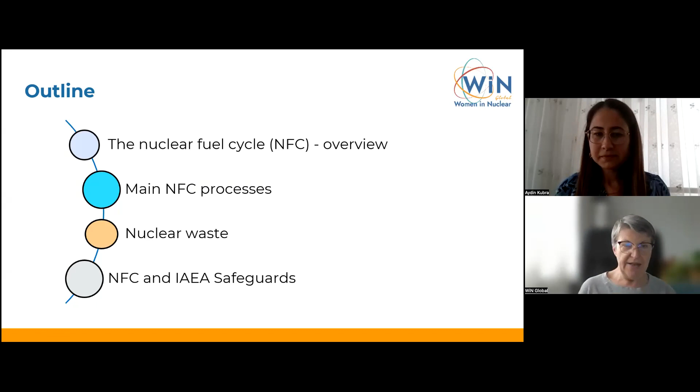As Kübra has said, if you have any questions, please put them in the Q&A at the bottom of your screen, and we will address them after I speak, although I don't mind if you have an urgent need to ask a question during my presentation. So we will look at what is the nuclear fuel cycle, what are the main processes, and we will also look at some waste issues and tackle the nuclear fuel cycle and safeguards.

Since this is a rather long presentation, I have created a Kahoot. I don't know whether all of you are familiar with Kahoot; it's a website that supports presentations with short quizzes. I've developed a few questions for some of the chapters, which we will address whenever the screen shows it. There will be a QR code plus a pin for this presentation, which you can access by scanning the QR code on your mobile phone or by connecting to Kahoot and entering the pin. Then there will be a question, and let's see who will have the correct answers at the end.

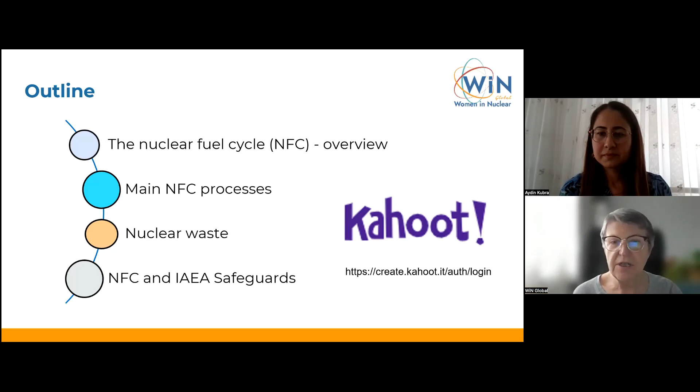So here is the display of the nuclear fuel cycle. What is the nuclear fuel cycle? According to the World Nuclear Association, it's a series of industrial processes where you convert certain material in order to make it suitable to generate electricity in a nuclear reactor, and also manage the spent fuel afterwards.

The nuclear fuel cycle, from the safeguards point of view, also leads to the production of nuclear material. And for those of you who work in safeguards, you know that nuclear material subject to safeguards is any isotope of uranium, thorium, or plutonium.

So how does this work? In order to first of all be able to produce the nuclear fuel, you need to know where it is.

So the first step in the nuclear fuel cycle is actually the exploration, where you look for either uranium or thorium. Once you have discovered where it occurs, then you need to mine it. The next step is to mill it, which means to crush the ore, put it into a mill, and refine it.

Then you need to take the concentrate to a conversion facility. And then, depending on the type of reactor you have, if it's a natural uranium reactor, you convert the uranium ore concentrate.

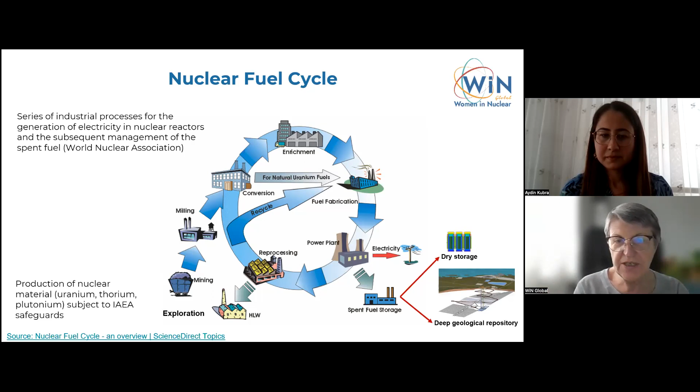into natural uranium UO2, which is then converted into fuel. Or for most power reactors, you need to enrich it first.

So you need to convert the uranium ore concentrate into UF6, send it for enrichment, and then convert it into UO2 again to produce fuel.

The fuel is then introduced into a nuclear power plant to produce electricity. After that, it is discharged.

It is either stored in a spent fuel pond for a while and then put into dry storage or wet storage, or for longer storage, it's put into a deep geological repository.

And in case you want to reuse some of the material that is still present in the spent fuel, you need to reprocess it, which is a process where you separate the uranium and the plutonium from the fission products. In a subsequent step, you separate the uranium from the plutonium.

So this is basically how the nuclear fuel cycle works. Let's also look at where nuclear material is produced.

So in the mining step, you produce either thorium-232 or uranium-238. In the enrichment process, you raise the U-235 isotope, which is the fissile one, which you need for the fission reaction.

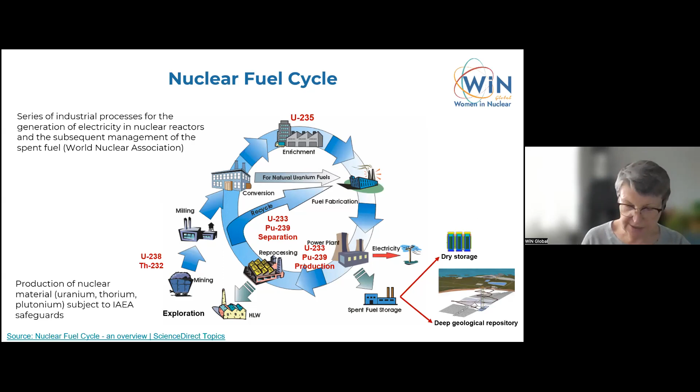So let's look at the concept of front-end and back-end nuclear fuel cycle. Everything in blue is the front end of the nuclear fuel cycle, that's everything from uranium mining and milling to conversion, enrichment, and fuel fabrication.

Whereas everything in green is the so-called back end of the nuclear fuel cycle, that's reactor storage and disposal or reprocessing. And then you can see these arrows going consecutively if you reuse the fuel.

Then you may have also heard about open or once-through nuclear fuel cycle. This means that the spent fuel is not reprocessed, whereas in the case of a closed nuclear fuel cycle, the spent fuel is reprocessed.

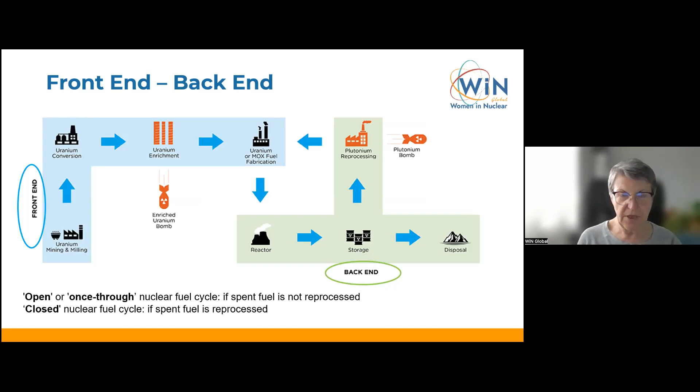So let's look at, first of all, some properties of uranium. You may know that uranium has been named after the planet Uranus. It is a silverish metal, and it's the heaviest of all naturally occurring elements.

It's very dense, and it was formed in supernovae billions of years ago. It's available practically everywhere on this planet with an average abundance of 2 grams per ton. It's even present in seawater, and it's possibly responsible for heating the Earth's core.

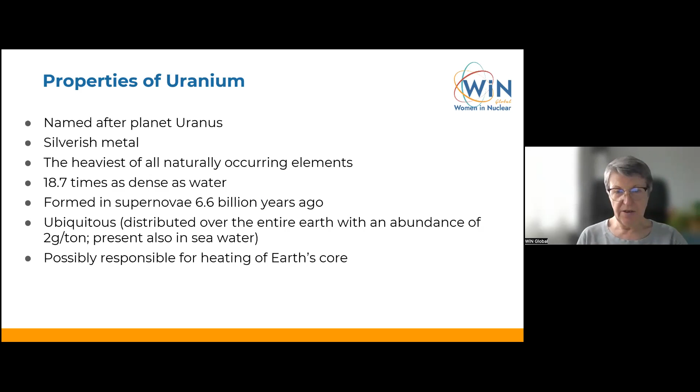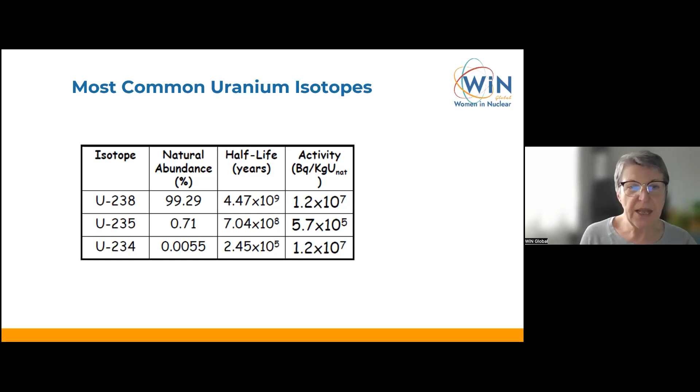The most common uranium isotope is uranium-238, which is present with a natural abundance of 99.29%. The fissile isotope is uranium-235, which is present with only 0.71% in natural uranium. And you also have some small amounts of U-234.

Let's look at some of the properties of thorium as well. Although in my presentation I will more concentrate on the uranium fuel cycle, thorium is also a very important element, which is even more abundant in nature than uranium, and which may be used in the future in case we ever run out of uranium, which is probably not the case in the near future.

So thorium, contrary to uranium, exists in a single isotopic form as thorium-232 in nature. It decays very slowly, and it's also very insoluble. So not like uranium, which is present in seawater, it's mostly present in sands, but not in a diluted form. And it is fertile, so not fissile, so you can only use it as fuel in conjunction with some fissile material.

For example, if you add recycled plutonium to it, you can use that thorium fuel to breed the fissile uranium-233, which then can be used in some types of nuclear reactors.

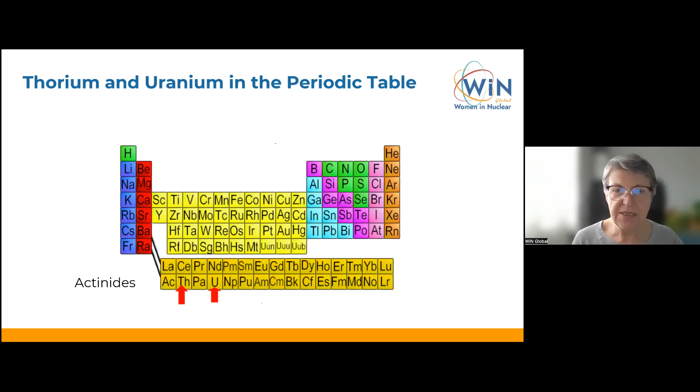And anything to the right of uranium is man-made elements.

What comes now? So first of all, we need to look at exploration, then at mining and milling. So how do we explore for uranium?

We may conduct some geological studies. Some countries also conduct so-called airborne surveys where they have preliminary satellite imagery survey and then use aircraft for a more detailed survey.

Once you are sure where the uranium is, you can do a surface survey. There are also some hydrochemical methods where you look for radium, the presence of radon in certain concentrations, which are indicative of the presence of uranium as well.

Once you are sure where your deposit is, you can do some well logging to determine the size of your deposit.

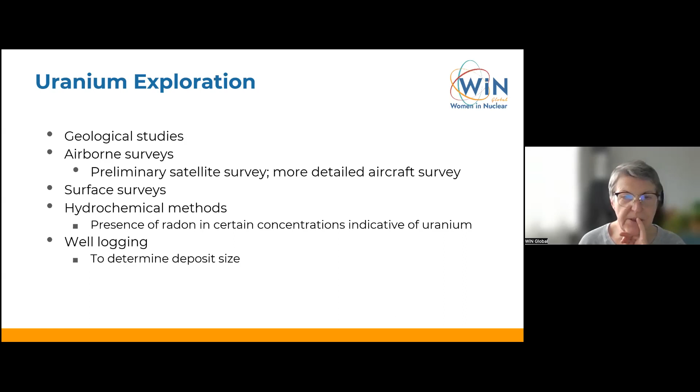We have basically 4 principal mining methods. One is open pit mining. The second one is underground mining. Then we have in situ leaching, and you can also rework the tails from a uranium mine.

In the case of in situ leaching, you need a certain geometrical formation in order to be able to do this. First of all, at the very bottom, underneath the uranium ore, you need an impermeable layer. Then you have the uranium ore, and then in between you have a permeable layer.

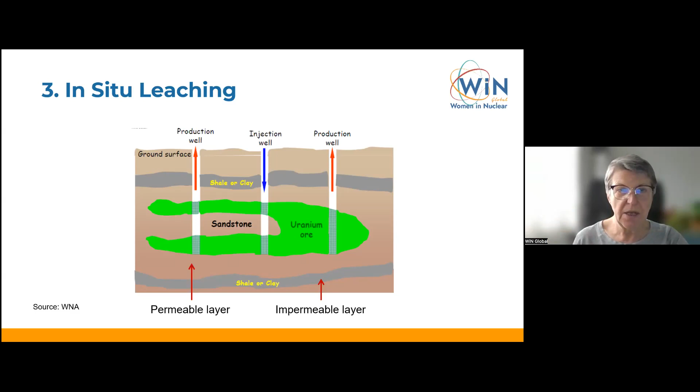So of course each of these methods has advantages and disadvantages. In case of an open pit, the advantages are that it's less hazardous and lower in cost and higher in productivity, but unfortunately it has a large environmental impact.

An underground mine has a lower environmental impact, but of course the risk to the workers is higher in terms of radon exposure and the risk of a cave-in.

And in situ leaching is safe for workers, of course, and it can be also used to mine lower grade ores, and there's no need to grind the ore anymore because it's already in a dissolved state. But the contamination can be quite substantial, and as I've said, it requires certain geological formations, and the recovery rate is also lower.

Let's look at thorium mining. So thorium is associated with several other minerals. Actually, it has been detected in over 100 different minerals. And in most cases, it's also uranium that is associated together with the thorium in those occurrences. And thorium-bearing minerals tend to concentrate in the beds of rivers and on beaches.

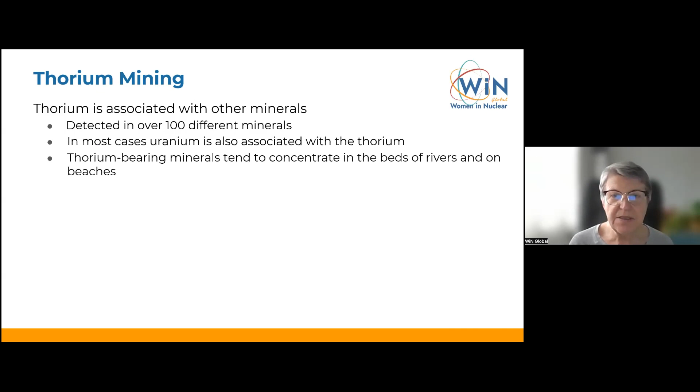Actually, the percentage of thorium found in its ore is generally greater than the percentage of uranium, so it's more cost efficient to mine. One important source of thorium I would like to mention is monazite, which is a rare earth phosphate mineral, and which has been used worldwide.

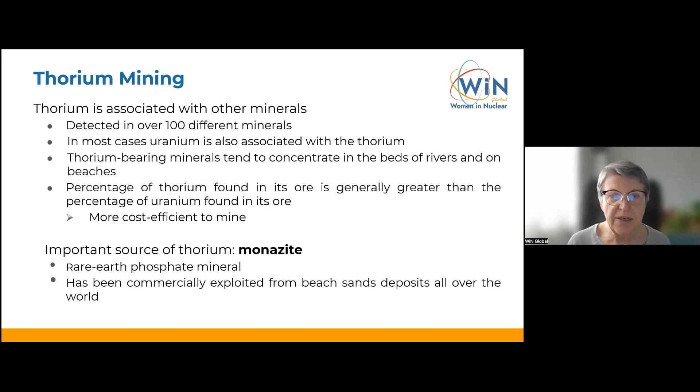It's present in beach sands and all over the world, and it has been used for mining thorium and uranium as well. So let's now look at the milling of uranium. First, you need to crush and grind the rock to a small size, like sand size.

Then you need to leach, adding leaching agents to dissolve the uranium, and depending on the process, this can be either acid or alkaline. Then you separate the uranium solution from the waste solids, and then you do some solvent extraction for purification and concentration.

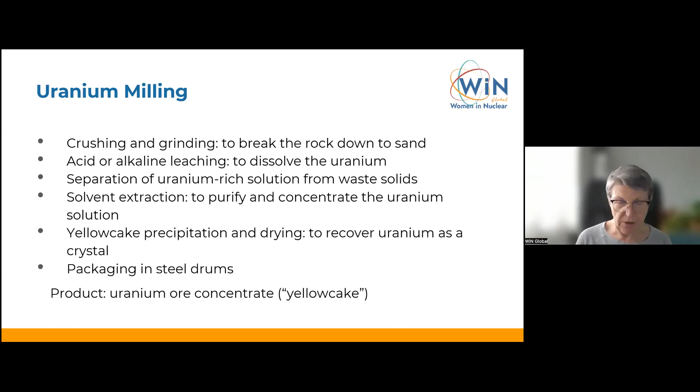Then you precipitate and dry the so-called yellow cake to recover uranium as a crystal. Then you package it in steel drums, and the product is uranium ore concentrate. It's sometimes called yellow cake as well, but it's not always yellow. I will tell you that in a second.

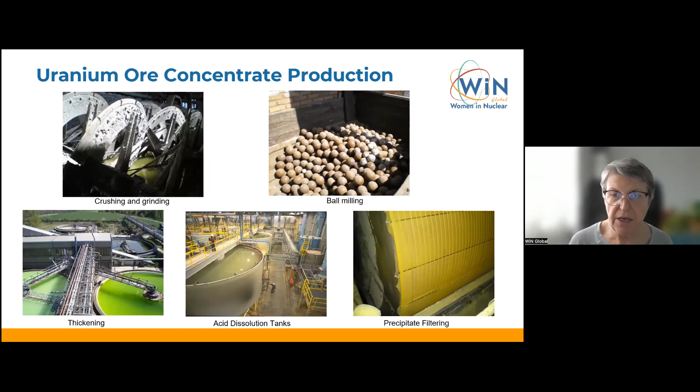So here's some of the equipment that is being used in mines. First, you need to crush and grind it. Then you use this ball equipment for the milling process. Then you have these huge ponds for thickening, acid dissolution tanks, and the precipitate filtering. You see in this case, it's a real yellow cake.

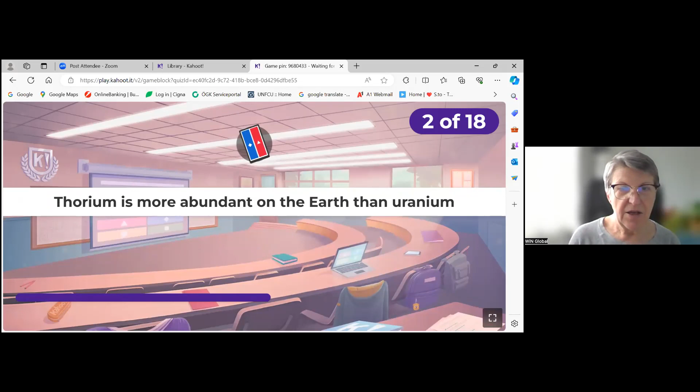So, thorium is more abundant than uranium. Is this correct or wrong?

So, remember one of the last slides, I said that thorium is more ubiquitous or more abundant on Earth than uranium. So the correct answer is true.

So let's look at the scoreboard. Aigun has overtaken Verka and Phoenix is number 3. Okay, very good. So, ladies, next one.

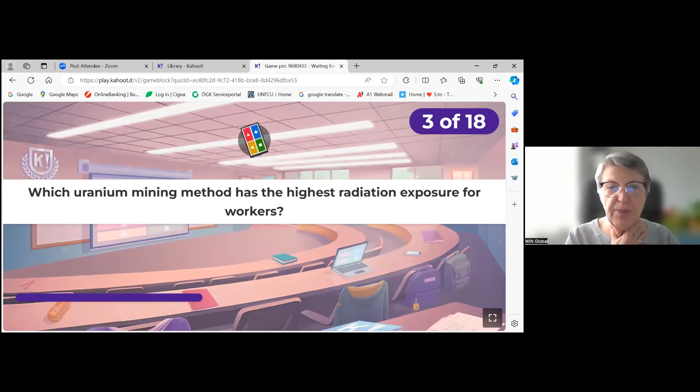Ready, steady, go. Which uranium mining method has the highest radiation exposure for the workers? Before you answer, think where the worker is. Is it open pit mining? Is it underground mining? Is it in situ leaching or tails reworking? Just think where the miners are and where they are most exposed.

So the correct answer was underground mining. And we have Aigun, Verka, and Phoenix again. I think the others need to work harder to beat any of these 3 ladies. So let's go for the next one.

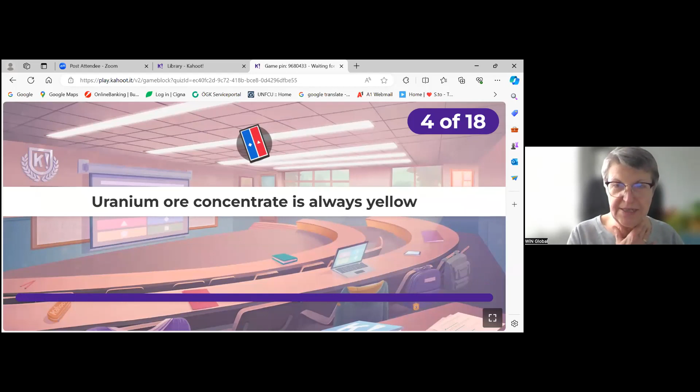Ready, steady, go. Is this true or false? Uranium ore concentrate is always yellow? Think of my last slide.

Very good. So, as you will remember, yellow cake is obviously always yellow, but uranium ore concentrate can be yellow or black.

So we have Phoenix overtaking Verka. Aigun is still on the top. And we have some followers. Very good. Let's go to the next one.

So question number 5: Kazakhstan is the world's largest producer of uranium. That should be pretty easy.

Okay, correct. So if you remember the last slide, the figures of 2021, it was Kazakhstan who had almost 50%, 45 point something percent. So that's a true statement.

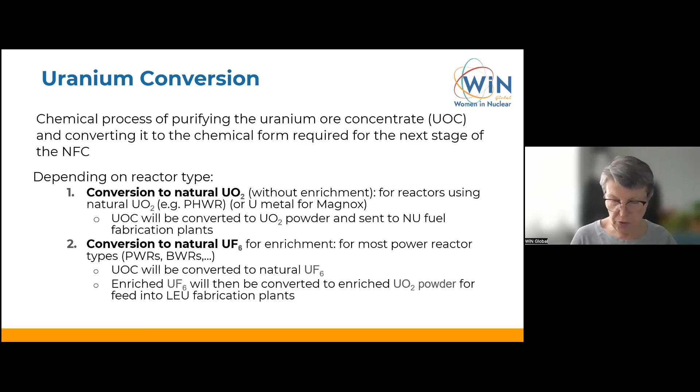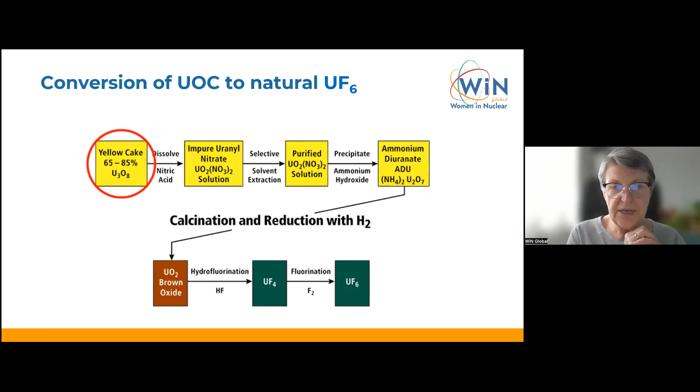Here's a schematic of the whole process. So first you take the U3O8, dissolve it in nitric acid. It's quite impure, so you need to purify it, precipitate it, reduce it, calcine it, hydrofluorinate and fluorinate it, and the final product is then UF6.

Let's look at some of the properties of UF6. So UF6 is actually quite reactive and corrosive, so it needs to be handled with great care. It also requires materials that can withstand the UF6. So UF6 is stored and processed either in stainless steel or aluminum alloys, nickel and nickel alloys. It also poses a chemitoxic hazard, so you have to be careful not to inhale it.

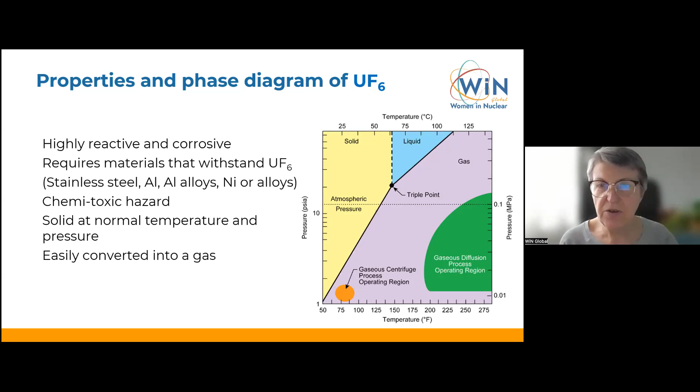And it has some interesting properties depending on the temperature and the pressure. It can be either solid at normal temperature and pressure, or it can become gas if you heat it up. And you can see this triple point, that is a point where it can be either solid, liquid, or gaseous.

Let's look at some countries that run conversion facilities. So for natural uranium, these can be Argentina, Canada, China, India, Korea, Pakistan, and Romania, who have CANDU type reactors. And those who need to convert the UOC to UF6, you have Brazil, Canada, China, France, India, Iran, Pakistan, Russia, UK, and USA.

Now, the next step in the nuclear fuel cycle is enrichment.

As I've mentioned, in natural uranium, the U-235, that's the fissile isotope that you need for the fission reaction in the reactor, only occurs at an abundance of 0.71%. So you need to physically increase that concentration, and enrichment are all the processes that increase this U-235 isotope in the uranium. And you need multiple stages to reach the required level of enrichment.

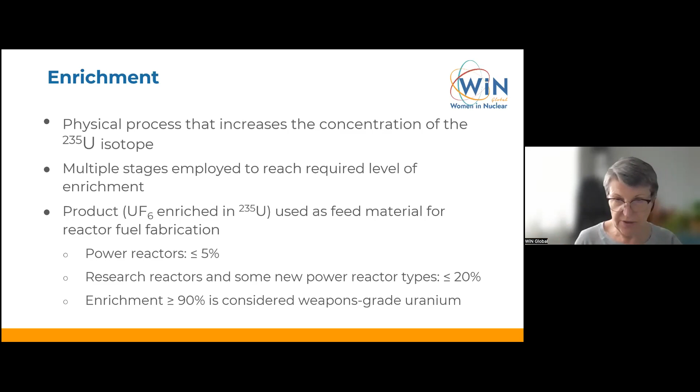And then the enriched UF6 is used as a feed material for reactor fuel fabrication. For power reactors, this can be an enrichment of up to 5%. In research reactors and some of the new reactor types, you use enrichment up to 20%. And for those of you who work in safeguards, anything that is 20% or above 20% is considered highly enriched uranium. Once the enrichment is higher than 90%, this is considered weapons grade uranium. So you can use it for weapons, nuclear weapons.

There are several enrichment technologies. The very first one that was used was gaseous diffusion. Then centrifuge enrichment. You can also use lasers for enrichment. So there's the molecular laser isotope separation, or the atomic vapor laser isotope separation, and the Australian process SILEX. You also have aerodynamic separation and several others like chemical, etc. And as I've said, all techniques use the slightly different masses of the uranium isotopes U-238 and U-235 for the separation.

Let's look at the most important one, which is the centrifuge enrichment. This process was developed already in the 1940s, but the diffusion process was a little bit simpler, and that's why it was used first. But nowadays, 95% of the enriched uranium is produced with gas centrifuges. Gas centrifuges need to be very resistant because they need to run about 25 years continuously without stopping. And the centrifuges are arranged in so-called stages, a large number of them in parallel. And those stages are then arranged in cascades.

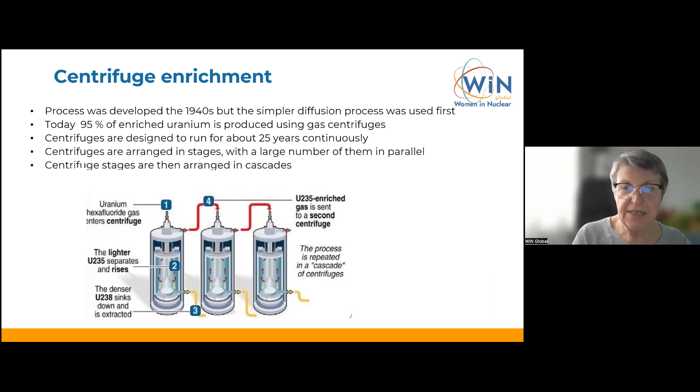So as you can see from the schematic, you feed the natural uranium hexafluoride gas on the top. Then it runs down the centrifuge, and the lighter U-235 separates and rises to the top, whereas the denser U-238 sinks to the bottom. The enriched stream is fed to the next centrifuge on the top, the depleted stream at the bottom to the next stage, etc. So this is how enrichment works in simple form.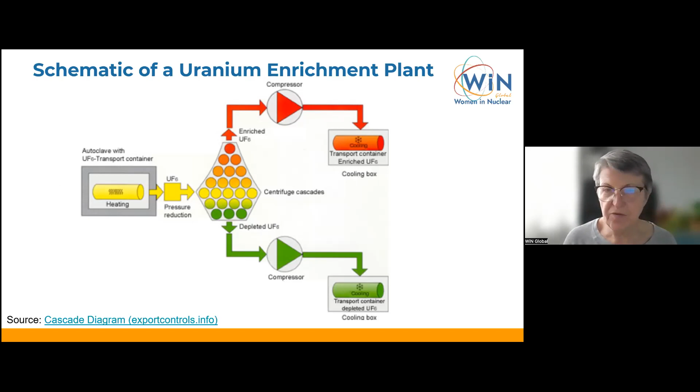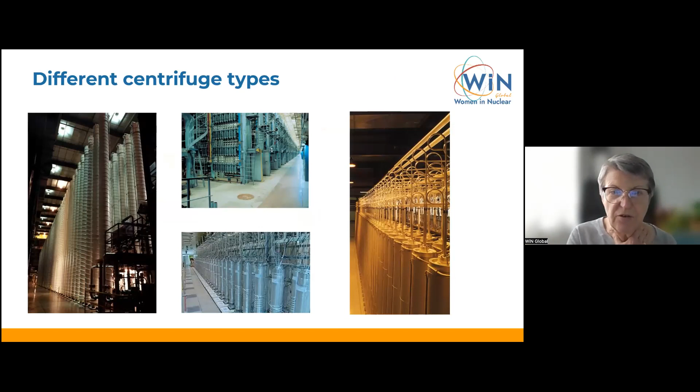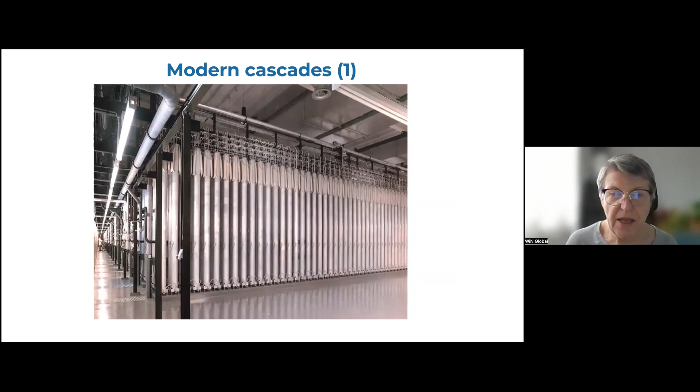And at the bottom, you compress the depleted stream and also collect it in depleted uranium UF6 cylinders, which are then stored somewhere, and they can be used for things like conversion to uranium metal for shielding, etc. Here's a look at the different types of centrifuges. You can see they can be either very high or very small, stacked on top of each other, or anything in between. And here is a photo of a cascade. You can see these large amounts of centrifuges connected. And here you can see the header piping. So it's a very complex process.

Here is a chart from the WNA on how you enrich 1 ton of natural uranium feed. On the x-axis, you can see the enrichment, the percent of U-235. On the y-axis, you can see the effort that is required for enrichment. It's called SWU, separative work units. I'm not going to go into details about that.

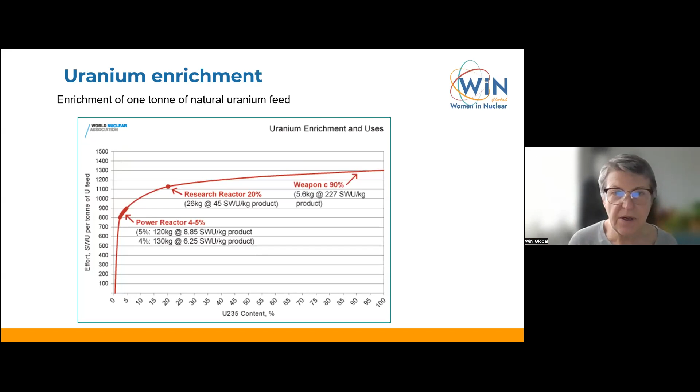But as you can see, if you want to enrich from the 0.71% to say 5%, you need a lot of effort. Whereas then to enrich from the 5% to the 20%, less effort is required. And then to enrich from the 20% to the 90%, even less effort is required. This is what I want to stress with the enrichment. At the beginning, you need a lot of effort, but the further you go in the enrichment, the less effort you need. There are about 14 countries that have enrichment facilities, and I'm not going to read them out to you.

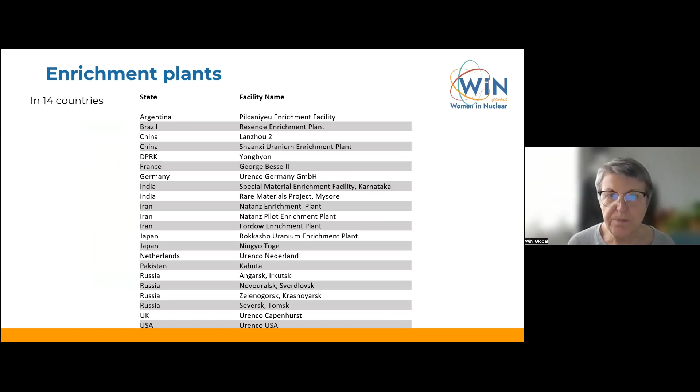And let's now go to the next step, which is fuel fabrication. So this is also an industrial process. You now know that the input is either enriched UF6 or natural UO2. So you have that UF6, which you first need to convert to UO2. Then you need to produce the pellets. Then you put the pellets into rods. Then you assemble the rods into fuel assemblies or into CANDU fuel bundles, depending on the reactor type.

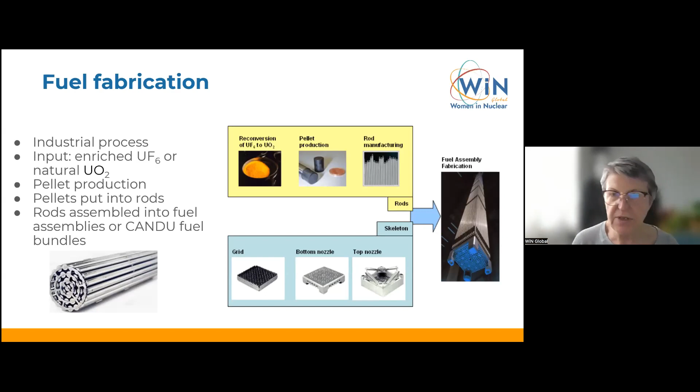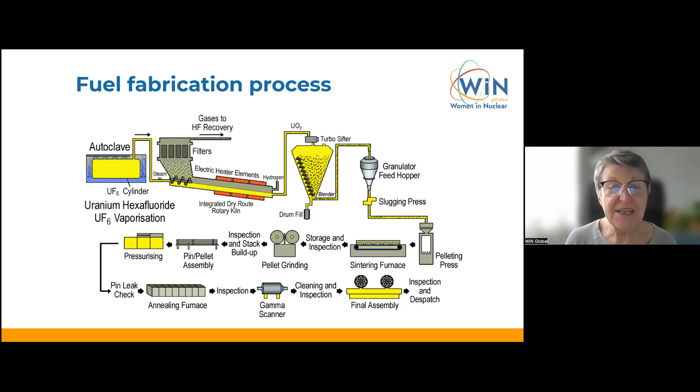In the case of the fuel fabrication process, let's now look at the enriched process. Here you start with the UF6 cylinder. Then you need to convert it into UO2. Then you need to put it into a pellet press. Then you sinter the pellets, you grind the pellets, you put them into the pins. Then you scan those pins and check whether they are not leaking. Then you assemble them into the fuel assembly. Then you inspect them and then you dispatch them to the reactor. This is basically a simple summary of the process.

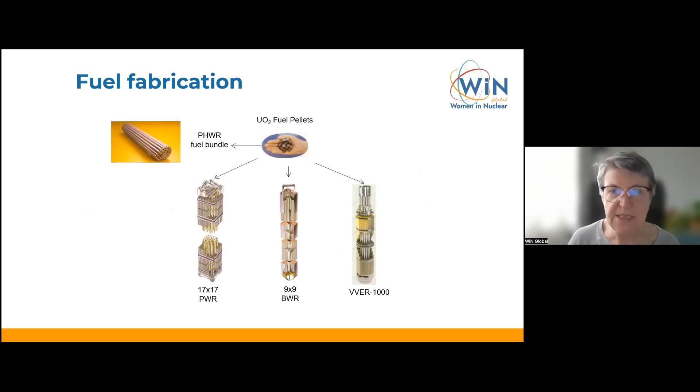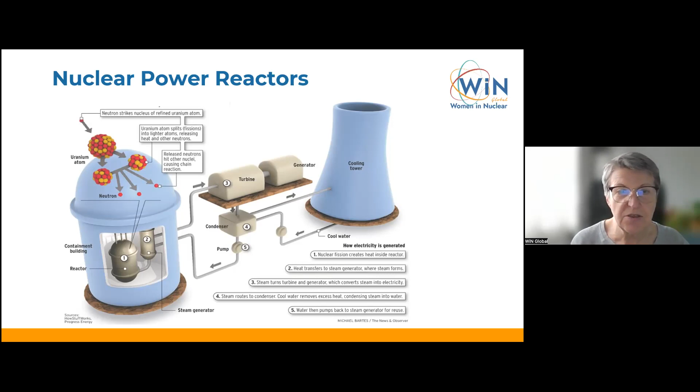Let's look at the basics of the most important power reactor types. So you have the pressurized heavy water reactor, which I have mentioned. You can see here that the core is actually not a core as you would expect in the other reactor types, but a so-called calandria, where the fuel bundles are put into tubes inside the calandria, and the control rods are moved from the top to the bottom. One specific of the heavy water reactor is that it does not need to be shut down for refueling; there's constant refueling as required. So it can be operational all the time.

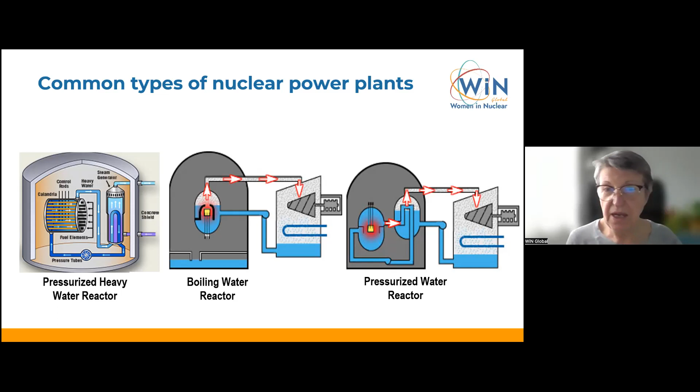So, ladies, we go to the next Kahoot. Let me change again to the Kahoot. Let me give you a few seconds before I open the Kahoot again. I hope you are all connected now. I think the next would still be the score. Okay, we have Igon. Igon, you are leading, but just a few points behind you is Phoenix, and then Verka, somebody called Name, and Azel. So those names which are not showing, here's your chance. Let me press next. 1, 2, 3, go.

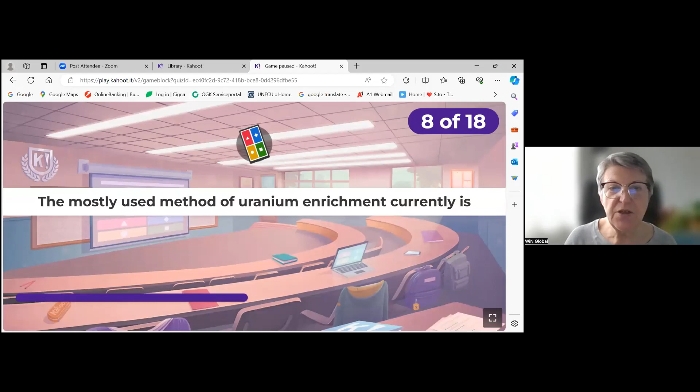The mostly used method of uranium enrichment currently is gaseous diffusion, lasers, gas centrifuges, or aerodynamic separation. I said it during my presentation. Which one is the most common method? So the correct one is gas centrifuges. Let's look at the score. Verka on top, Phoenix, NJ, RIE, catching up. Ready for the next one?

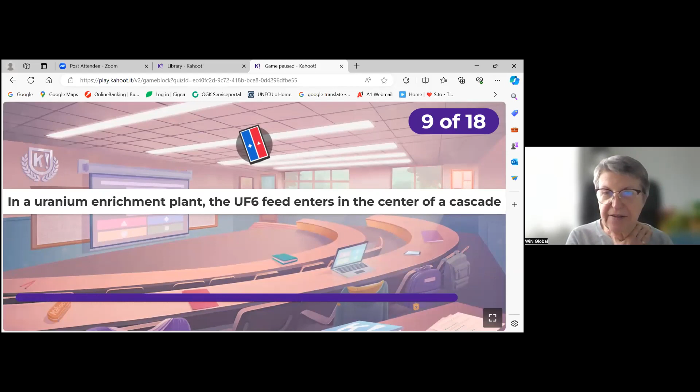Is this true? In a uranium enrichment plant, the UF6 feed enters in the center of a cascade. Is this true or false? Think of the schematic that I showed you of the plant and the cascade. Okay, so that was the true statement. So let's look at the score. Verka leading, Phoenix, NJ, Valerian catching up, RIE falling behind. Next one.

When enriching uranium, the most effort is required to enrich from 60 to 90%. Think of that curve. Is this correct or false? Yes, this is a false statement. The most effort is required at the beginning of the enrichment process, but the higher you enrich, the less effort is required. Okay, next question. So scoreboard. Okay. I think this is the score. Verka, Phoenix, NJ, Valorine, REI. Next one.

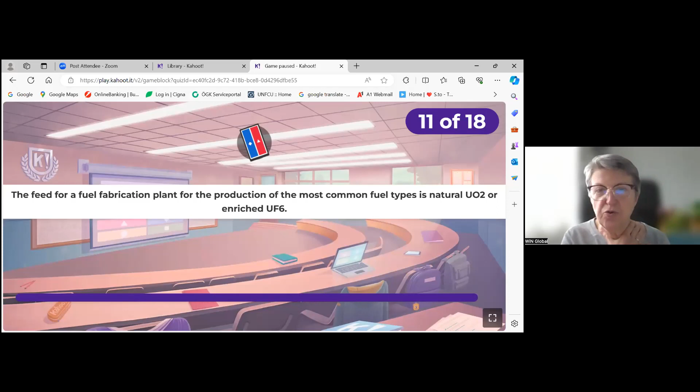The feed for a fuel fabrication plant for the production of the most common fuel types is natural UO2 or enriched UF6. Is this true or false? So this is the true statement. Yes, as I've mentioned several times, it's either natural UO2 or enriched UF6, which you feed into the fuel fabrication plant. The score is Verka, Phoenix, NJ. So now question number 12, which is the last one for this section. Ready, steady, go.

In a pressurized heavy water reactor, fuel is exchanged without shutting down the reactor. Remember the slide with the calandria. Okay, that's a true statement. Let's look at the score. Verka, Phoenix, NJ. Okay, ladies, I stop sharing here. Very good.

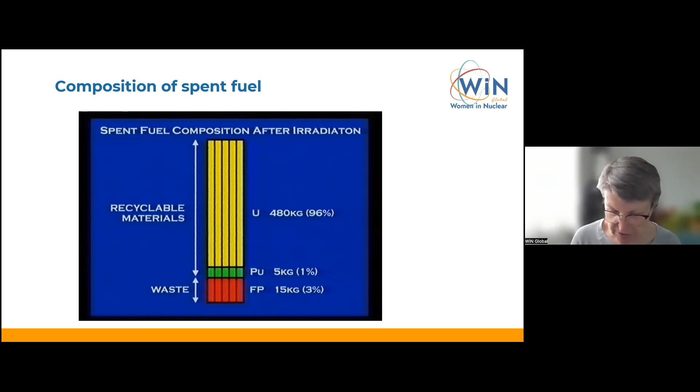Let's now share the other one, the presentation. Okay. So we have now finished the enrichment. So the front end is finished. Let's now look at the composition of spent fuel after irradiation in the reactor. As you can see, there's still a lot of useful stuff in that spent fuel. You have a lot of uranium still present, 96%. Then you have produced some plutonium inside the reactor, like 1%, and 3% are real waste, namely fission products, although maybe some of those fission products could be used for radioisotopes, but mostly it's considered to be high-level waste.

So what are the characteristics of spent fuel? A spent fuel element is geometrically and structurally intact. If you look at it from outside, there's no difference to fresh fuel, but it's highly radioactive, so it needs some shielding. It's also very hot, so it needs some cooling. And it contains many different radionuclides with different half-lives. Some of them have only seconds of half-life, and some of them have millions of years. And as I've mentioned, they still contain some valuable materials like uranium, plutonium, cesium, cobalt, etc.

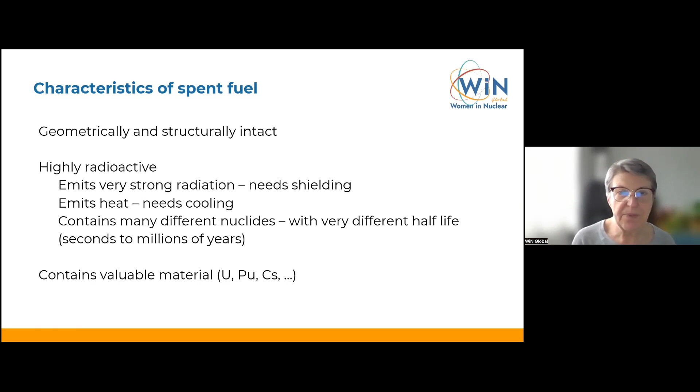In a reactor, you also produce plutonium, which is a man-made element with the number 94 in the periodic table. And it's produced both in research reactors and in power reactors. The half-lives of the plutonium isotopes can be between 14 and 375,000 years. So quite a difference here. And the composition of those plutonium isotopes in the spent fuel depends on the type of fuel, the time that the uranium is irradiated inside the reactor, and the reactor type. At the bottom, I think you have all heard about low burn-up and high burn-up. So the burn-up is how long you leave the fuel inside the reactor.

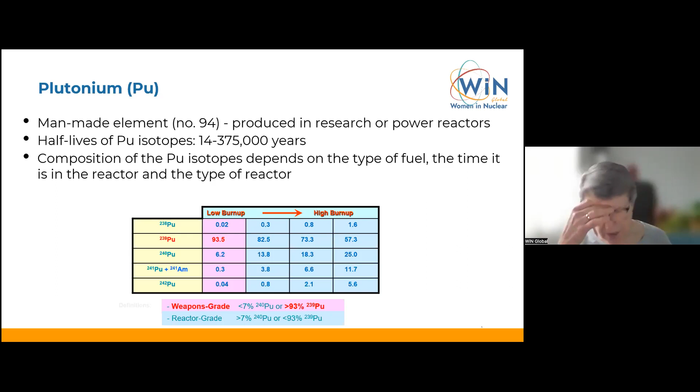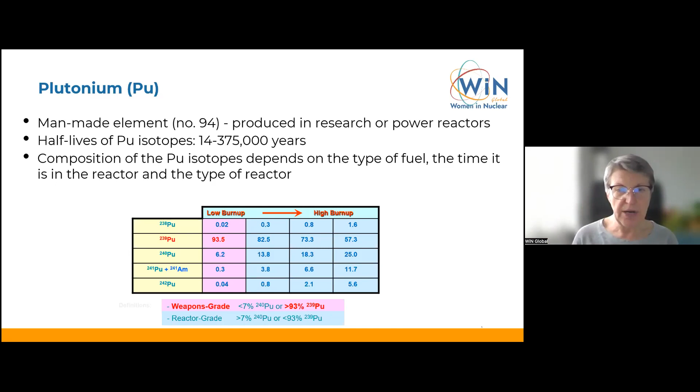From a safeguards perspective, low burn-up fuel will contain a lot of plutonium-239. You can see those figures in red on the left. Any plutonium that has plutonium-239 quantities greater than 93% is considered to be weapons grade. The longer you leave the fuel inside the reactor, the more higher plutonium isotopes will be produced. So-called reactor grade plutonium will only have smaller quantities of plutonium-239, but they are all under safeguards. But from a weaponization point of view, you would be interested in low burn-up reactor fuel.

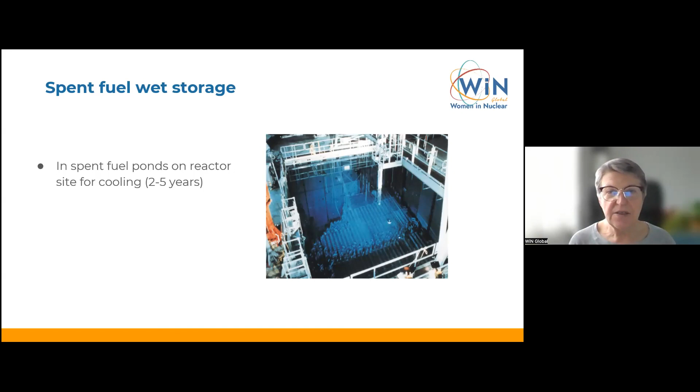Once the fuel is discharged from the reactor, it's put into a spent fuel pond where it is stored for cooling for 2 to 5 years, depending on the capacity, etc. So this is the spent fuel wet storage.

After that, you have several options. Either you take it to another wet storage facility after cooling, or you store it in a dry manner, or you put it in a deep geological repository, or you reprocess the fuel to recycle some of its uranium and plutonium.

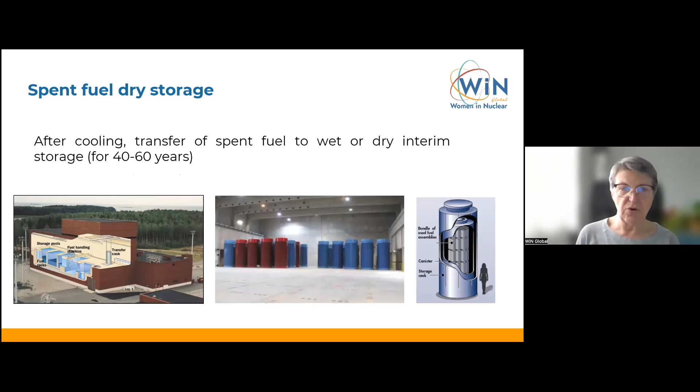This is just an overview about dry storage, what a dry storage facility looks like, the dry storage casks, their size, and the shielding. You can store them there for 40 to 60 years.

Many countries are looking at the option of a deep geological repository, where the spent fuel is isolated in geological structures, expected to be stable for millions of years, because of the very long half-life of some radioisotopes still present in the spent fuel. There are both natural and engineered barriers. The natural barriers are water-impermeable layers of rock, for example clay, or gas-impermeable layers, for example salt. The engineered barriers are either bentonite clay or cement.

Finland and its Onkalo facility are the most advanced facility of this type. Here's an overview of what it looks like, how deep inside the ground it is - more than half a kilometer. You can see on the right-hand side those green tubes, which is where the fuel will be stored.

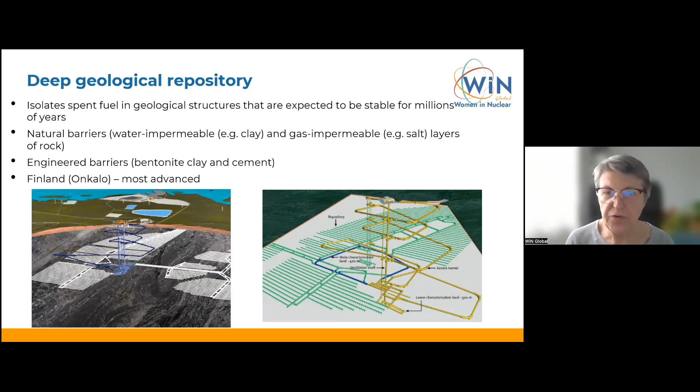Let's now move to spent fuel reprocessing. In this step of the nuclear fuel cycle, you separate the plutonium and the uranium from the fission products, and then purify these elements. The separated plutonium and uranium isotopes can then be made into recycled reactor fuel, so-called MOX fuel, mixed oxide fuel, and reused in the reactors.

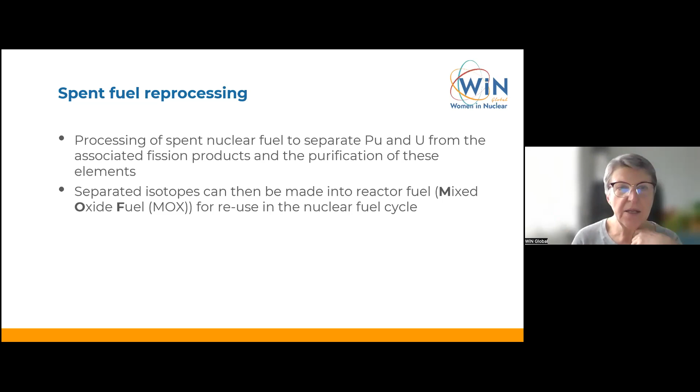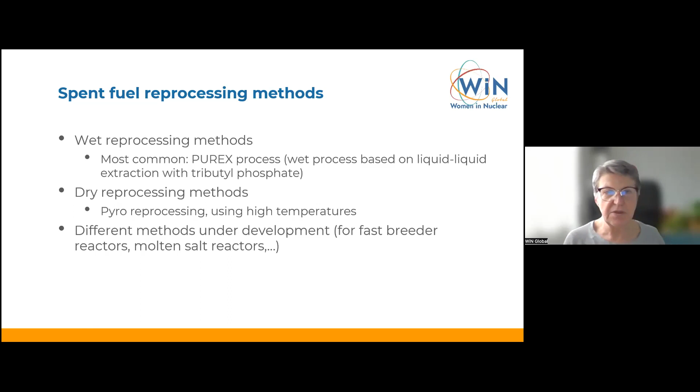There are several reprocessing methods. There are wet reprocessing methods, the most common being the Purex process. Then there are dry reprocessing methods like pyro-reprocessing that uses high temperatures, and other methods under development for fast breeder reactors, molten salt reactors, etc. The most important process currently is the Purex process, which stands for Plutonium-Uranium Redox Extraction.

In the reprocessing plant, the spent fuel is received in casks inside the spent fuel pond. The fuel assemblies are removed from the casks and stored. Then they are taken to the chopping station, where the fuel assemblies are chopped up and the contents are dissolved in nitric acid.

The next step is separation, where you separate the fission products from the uranium and plutonium. The fission products are vitrified and stored safely. In the next step, you can then separate the uranium and plutonium and purify them.

There are several countries running reprocessing facilities. Some of them are no longer operational. I think at this stage it's China, France, India, Japan, Pakistan, and Russia who are reprocessing. All the other countries are not reprocessing, or not reprocessing anymore.

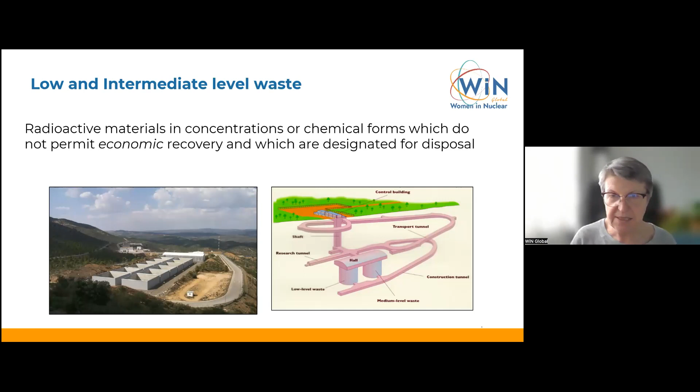Let's now look at some safeguards considerations. Not all radioactive material is subject to IAEA safeguards, and I mentioned at the beginning of my presentation which material is subject to IAEA safeguards. That's so-called nuclear material - uranium, thorium, and plutonium.

There are two nuclear fuel cycle facility types that could produce weapons-usable material. The first is uranium enrichment, where you can enrich up to 90% and above, considered weapons-grade uranium. The second is spent fuel reprocessing plants, where you can separate out the plutonium and use it for nuclear weapons.

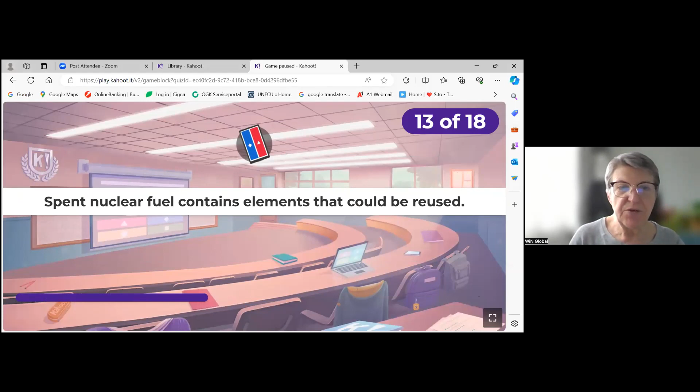Spent nuclear fuel contains elements that could be reused. Is this true or false? So everybody got that right. Bravo. Yes, of course. There's a lot of stuff inside the spent fuel that can still be reused.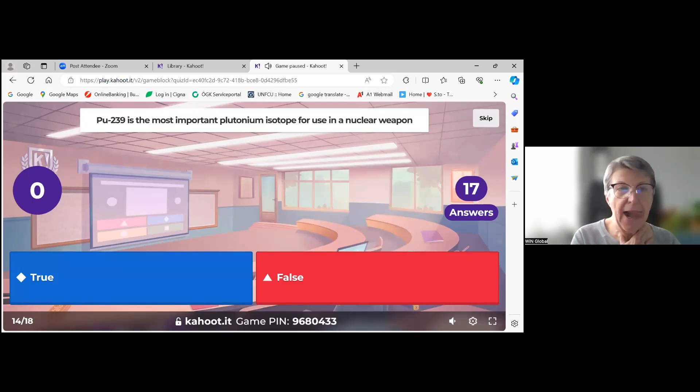Very good. So that's a true statement. You need... I mean, you could also produce a nuclear weapon from other plutonium, but the higher the isotopes of plutonium, the more properties they have that don't make them so good for using in nuclear weapons. So it's mostly plutonium, low burn-up fuel, where you have a lot of plutonium-239 that is good for nuclear weapons. Next question.

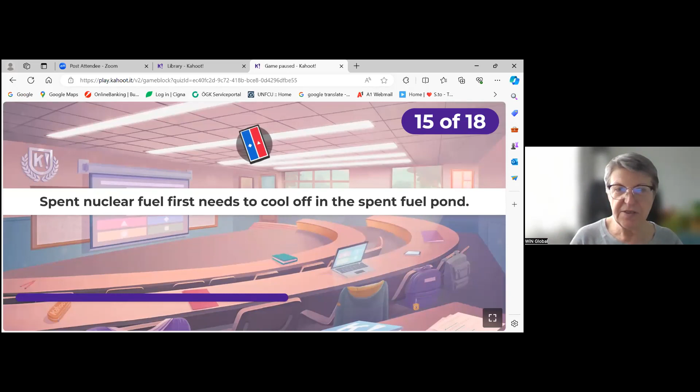Spent nuclear fuel first needs to cool off in the spent fuel pond.

That's a true statement. You can't just, when you remove the fuel from the reactor, it's very hot and you first need to cool it off before you can do anything else. And as I said in my presentation, you need to cool it for 2 to 5 years.

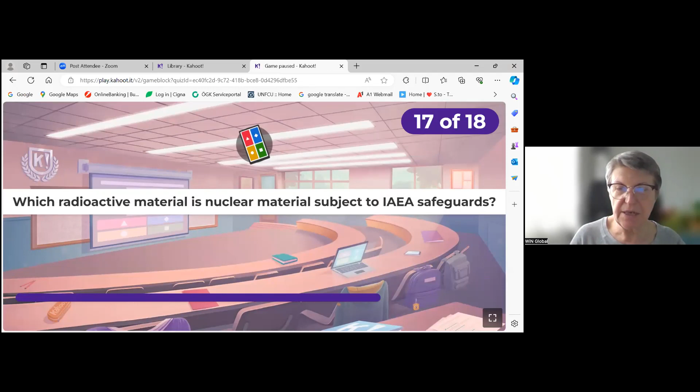Which radioactive material is nuclear material subject to IAEA safeguards? Uranium, thorium, fission products, plutonium.

You have to select many, not some of them, right? Okay, uranium, thorium, plutonium. Fission products are not subject to safeguards. They are considered high-level waste and they go for storage. But the uranium, thorium, plutonium are subject to IAEA safeguards, no matter where they are.

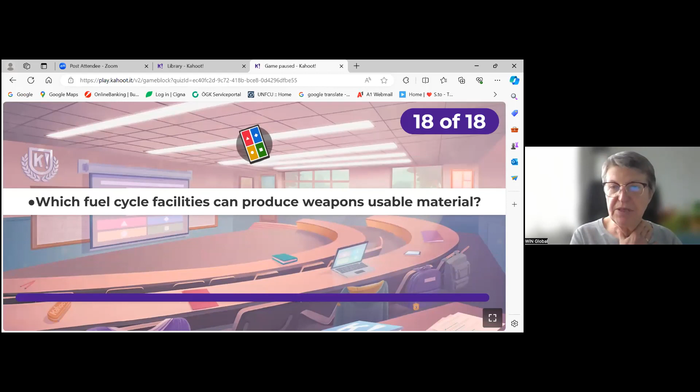Oh sorry, this is the last one. Which fuel cycle facilities can produce weapons usable material? Conversion, uranium enrichment, reprocessing, uranium mine.